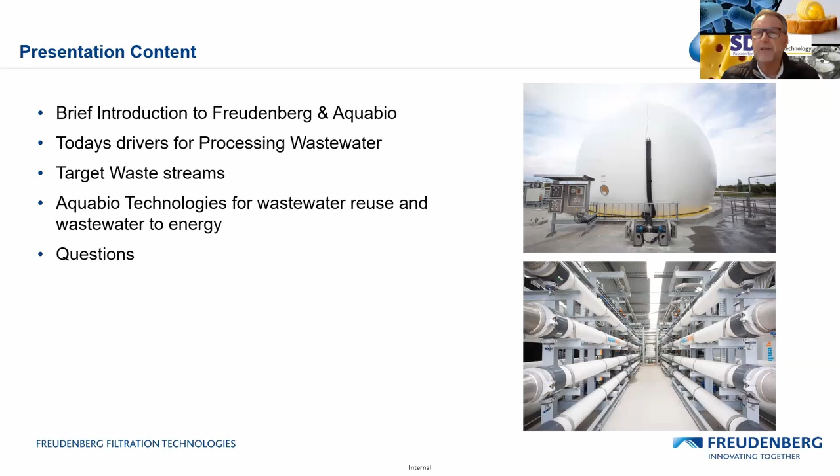I'm going to give a quick brief introduction on Freudenberg and Aquabio. We're also going to look at the global trends in processing water and water recycling and net zero. And there's both a global trend, but there's also the local challenges it gives us as well. So I'll have a quick look at that. To try and hone it in a little bit before Dave speaks about the actual technologies, I'll talk about the actual target waste streams that we'll all be used to. And then Dave will give a chat about the actual technologies itself, which you'll hopefully find quite interesting. And then I think we've allowed some 5 or 10 minutes at the end for any specific questions that we can help with.

So just quickly, Freudenberg. So myself and Dave work for Aquabio. We were acquired by Freudenberg nearly 10 years ago now, actually. Freudenberg are a large family-owned German technology development and operational business. And you'll see with some of the numbers there, there's like a 10 billion turnover, pounds sterling per annum, employing over 50,000 people globally. But when they acquired us, the real interest that they give us as the mothership, in theory, is the ability to feed down information on research and development. So it allows us to continue to develop our products that we actually bring to market.

And because Aquabio are what we call an EPC contractor, we take on full responsibility on customer sites from initial conception right through to the actual building and commissioning. There's a lot of process guarantees required. There's a lot of bank bonds put in place until the technology is up and running. So having a large company behind us gives us the ability to be able to do that.

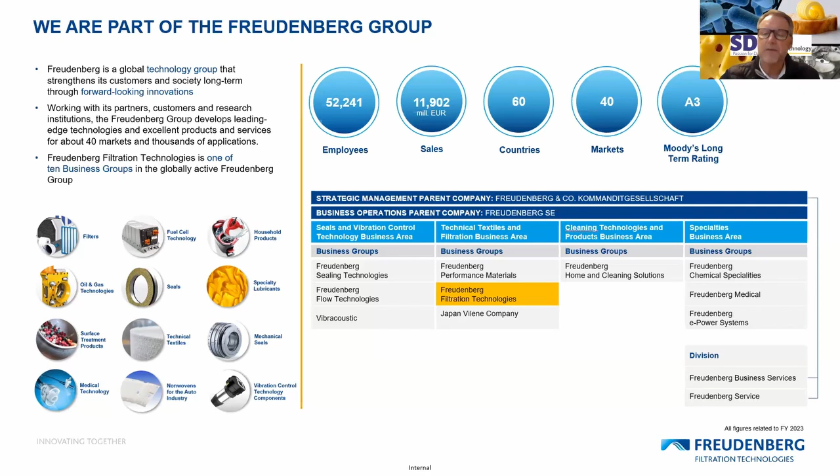As Aquabio, with three pillars, it's all really about saving energy, especially in today's world with the cost of energy, and a lot of the technologies that were developed are very much what we call low energy. So really looking at the cost of actually running them from an OPEX point of view. It's all about recovering resources, and water being one of the biggest resources to mankind, really. That's where our real focus has been for the last 25 years, focusing on recycling water. And to keep every business going, it's all about reducing costs. So a lot of the technologies we've topped and tailed and cleared over the last 20 years. And it's all about providing something that's robust, but at the same time is competitive in the marketplace.

To keep things simple, we really operate two types of technologies. You've got aerobic membrane bioreactors, and Dave will talk more about this, but it tends to look at the CIP and the high volume but low loading or low contamination waste streams. And then you've got the anaerobic technology, which is an anaerobic membrane bioreactor, which basically looks at extracting organics from high load COD waste streams, where you can extract and actually convert the material into biogas, which converts into biomethane, which in theory is a renewable energy. And in both those applications, we can then add on the next step, which takes us into water reuse.

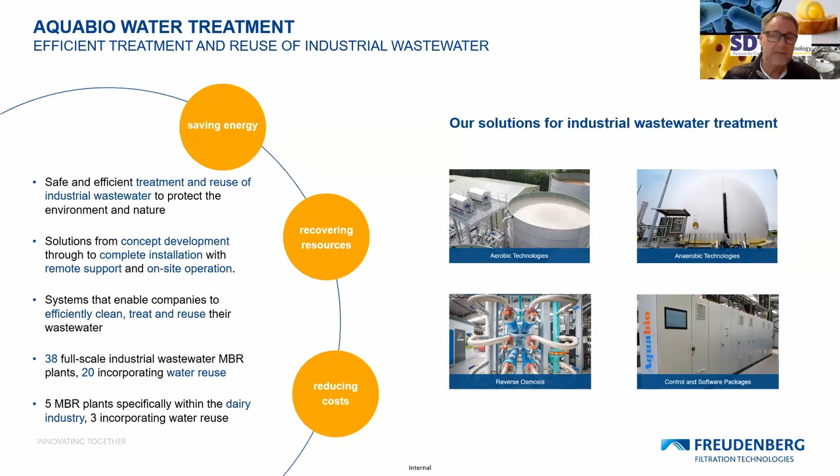It could get quite complex, a lot of this technology. So our real USP is actually the ability to control it all by our own in-house control and software packages, which is linked in with SCADAs. These type of plants, we've got 38 of the full-scale plants across the UK, and 5 of these membrane bioreactors are actually in the dairy industry. So we're well used to the waste streams and the challenges and the daily flows and CIP regimes and what have you from that industry.

So just quickly looking at the drivers, what we're noticing from a global perspective, and it's been picked up by a lot of people now looking at developing technology, is that there seems to be a new generation of consumers. So people actually buying the end product are looking at how a product's actually manufactured, where it's manufactured, how much energy, what's their carbon footprint. And a lot of the work we do actually, and you probably pick up from the Scottish accent, is from the Scottish distillery market.

And they've got a challenge. So if you imagine making a pint of milk and putting it in a carton, then putting it in a warehouse, and then trying to work out who's going to buy it in 10 years' time. Well, that's actually the problem that the distillery market has got, where they're manufacturing a product now, but they're trying to work out who their market is going to be in 10 years.

And they've realized that the market in 10 years is going to be a much more savvy audience and consumer that's going to be looking at what the carbon footprint is, how much energy they're taking, how clean it is, how they deal with their waste. And I think it's important now to start looking at that; the consumers are definitely driving the market and how products are actually made and manufactured.

Cost, huge driver, always will be. I think there was mention earlier about the changes over even the past 4 or 5 years in world politics. Energy security is really important. If there's the option to take indigenous waste from any site and convert it back into energy, that has to be seen as a positive step forward. One from a corporate responsibility point of view, but also from a consumer point of view as well.

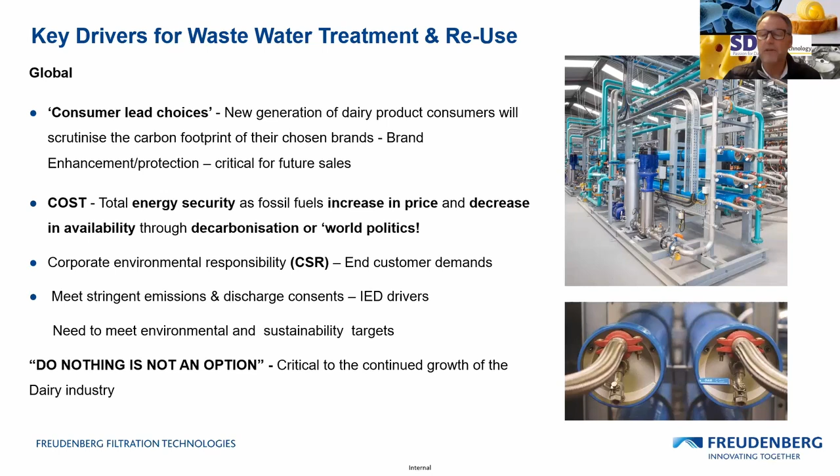So that was the global look. If you look at the day-to-day issues that we all see on customer sites, there's limitations on water demand from network and aquifers. We're seeing huge issues on the east coast of England on water scarcity, where businesses are finding it difficult to grow because they can't get access to water. So the idea of recycling water could be quite interesting.

We're seeing costs increase both for discharge consents and for water coming in. So if there's an ability to recycle water, there's a huge cost-saving benefit there. Water and the management of wastewater is an ever-increasing and valuable resource because it's a cost. If you can manage that cost better, there's a solution in there. So the solution that we've got is to manage and valorize waste and byproducts, in a lot of cases whey waste, on site to turn indigenous waste into local renewable energy or clean water.

And how do we do that? Well, we've got two types of technologies that Dave will come on and talk about. You've got an anaerobic membrane bioreactor, which is looking at liquids, and that turns waste into biogas or biomethane. And we've got an AMBR, which is an aerobic membrane bioreactor with an RO added onto it. What that's doing is taking water and cleaning it into potable water. So in theory, it can go back into product, which we're actually seeing in some sites already.

I understand there's sometimes a bit of a psychological step about using recycled water back into product, but many industries now are doing that, and they're also taking it further. They're also using it for CIP processes and general maintenance and cleaning.

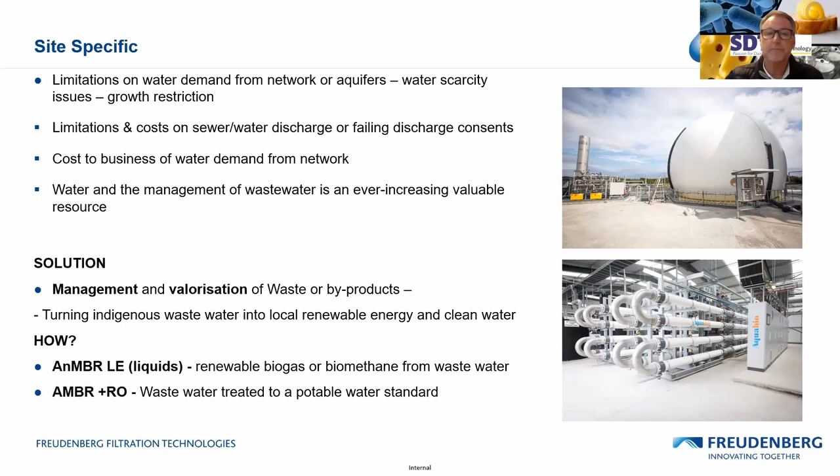Just to focus a little bit, the waste streams that we would particularly target, and I touched on this earlier, are low to medium COD, so it tends to be high volume, low strength. That's typically from CIP regimes, and that can vary depending on what regimes are put in place at each factory or processing outlet. So having a technology, and Dave will talk about this, that's flexible on how it receives material, what loads, what flows, which can fluctuate greatly, is really important.

You then go into the higher COD waste, where you've got a lot of sugars which you can convert into biogas. So that's on-site indigenous energy, and that tends to come from whey and whey permeate. And I'm sure we've all come across unused milk for whatever reason. That could be processed through this technology as well.

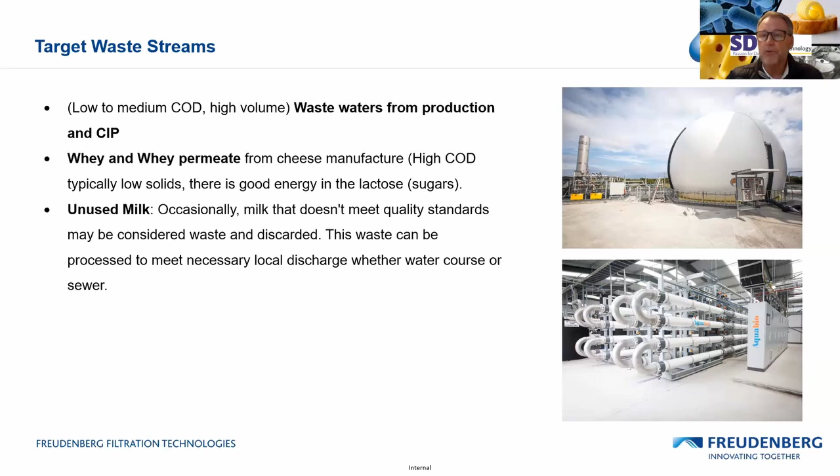So I'll pass you on now to Dave, who'll take you through a technical walkthrough of how the technology works. And again, there's time for questions at the end if there's any specific questions.

Thanks very much, Phil. Morning, everybody. Right, our AnMBR process.

We take wastewater or feedstock, and this enters into our bioreactor. This bioreactor is a tank which is kept under anaerobic conditions, which is essentially in the absence of oxygen. Usually, but not always, some of the waste stream needs to be supplemented with some nutrients. This is to aid the biological process. Some of the streams are a little bit deficient in nitrogen, not necessarily phosphorus, but certainly some of the micronutrients. So there is occasionally an addition of a nutrient solution added to the waste stream to aid that biological process.

Within the anaerobic bioreactor, as Phil's already alluded to, the organic matter is converted into biogas. So that biogas can then be utilized either to produce energy on site via boilers or steam generation, or on occasions that biogas could be refined or enriched and entered into the gas main national system and sold as an energy source to the public or other industries. Also occurring in the bioreactor, the COD is converted into a small amount of biomass.

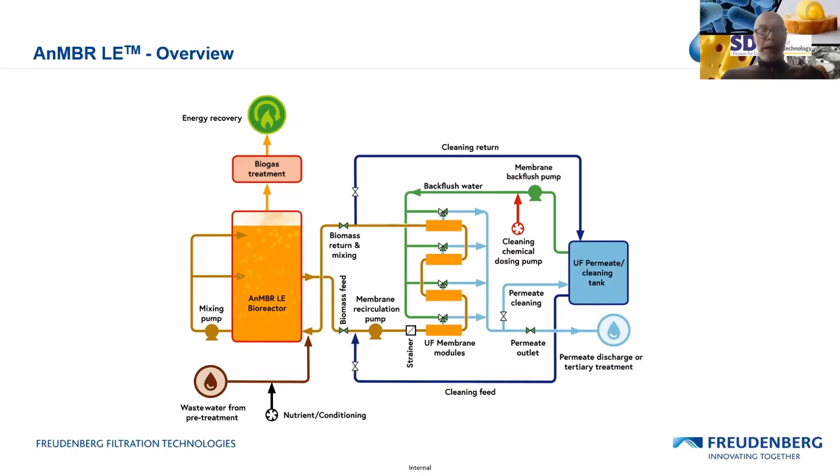So typical waste streams that are suited to the anaerobic process: you want to consider where you want to maximize the use of the biogas or produce a biogas from your waste stream, and that utilization of that energy is critical to your process, or is certainly seen as a revenue stream. You may also want to achieve higher COD removals to reduce the sewer discharge costs, and potentially produce an effluent that you could discharge to a water body if that's applicable to your particular geographic location.

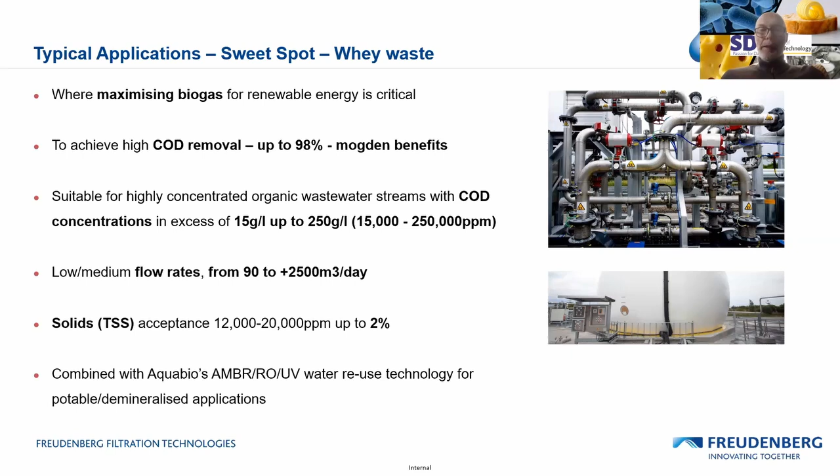Waste streams that are more, as Phil was alluding to, applicable to the anaerobic process are high strength or organic streams. So with CODs, concentrations between 15 to 250 grams or 15,000 to 250,000 ppm of COD. Low to medium flow rates. Our anaerobic process can tolerate waste streams which have suspended solids up to 20,000 ppm or 2% dry solids. And when combined with our AMBR, RO and UV, the effluent produced can then be carried on and retreated to produce a water which is deemed potable or certainly utilized for reuse.

Other benefits that we get from the AnMBR process is that because we're using a membrane system, we're reducing or eliminating the suspended carryover from the process, and that mitigates the biomass washout. We're producing a very high quality suspended solids effluent. We've got the ability now because we can decouple hydraulic and solids retention within the reactor. This allows the process to be run at relatively long sludge ages. This certainly helps with the degradation of some slowly degradable components within the effluent.

Typically, we produce high COD reduction and biogas quality and yields, which are in excess of some of the other higher rate anaerobic processes, such as UASB and EGSB. Our process is also more tolerant to suspended solids and fats, oils, and greases than a traditional granular sludge process. The low energy biomass separation system that we incorporate doesn't need flocculants or coagulants to aid that separation process. And typically the energy that we will consume during the membrane process will be between 1.5 to 2.5 kilowatt hours per meter cubed of permeate output.

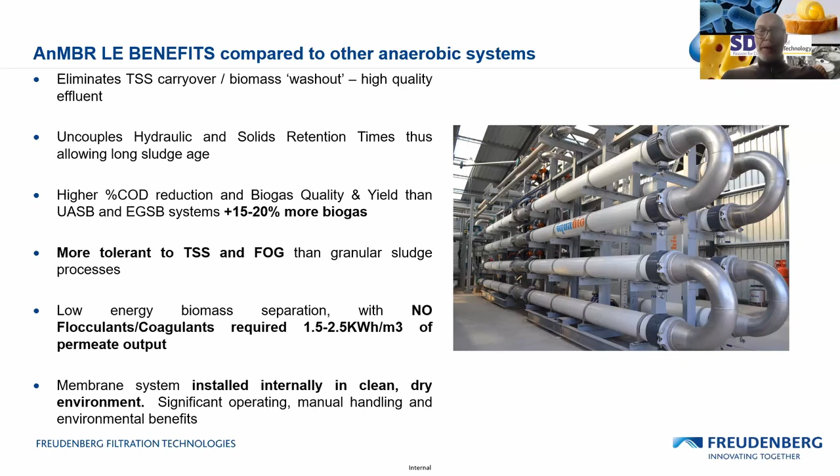As you can see from the photograph shown on the slide, our membrane systems are installed internally in a clean, dry environment. This has a significant advantage when it comes to operating, manual handling, and environmental benefits. Our other process, which is now the aerobic process or an AMBR, adopts a very similar process stream. The only real exception here is we've now got a bioreactor that's no longer anaerobic. So the biomass is utilizing atmospheric oxygen derived from the air, blown into the reactor, and we're using that oxygen to degrade the COD down into water and carbon dioxide.

Oh, sorry, Phil, if you pop back to the previous one for us.

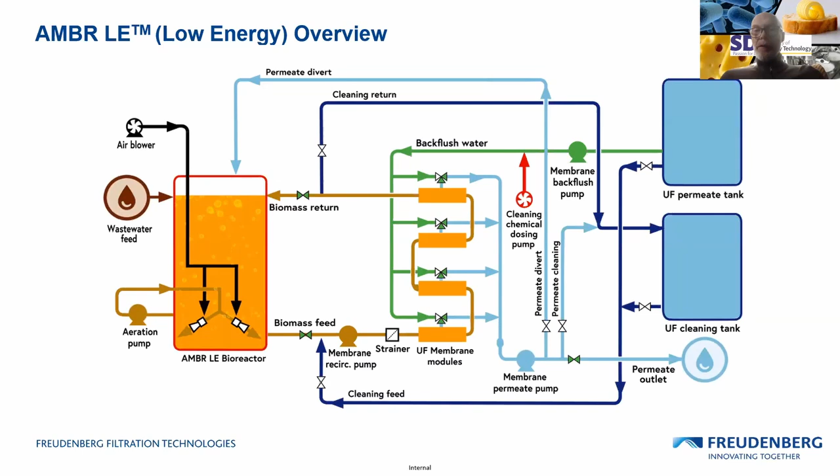Again, we're using an identical membrane system. So we're recirculating that biomass through the membranes and separating treated effluent from the biomass. The only slight difference here now is that we found that the filterability of an aerobic sludge or an aerobic biomass is slightly better than an anaerobic equivalent biomass. So the number of membranes used to produce the same amount of output is less. We utilize all the same mechanisms for backwashing and cleaning of the membranes.

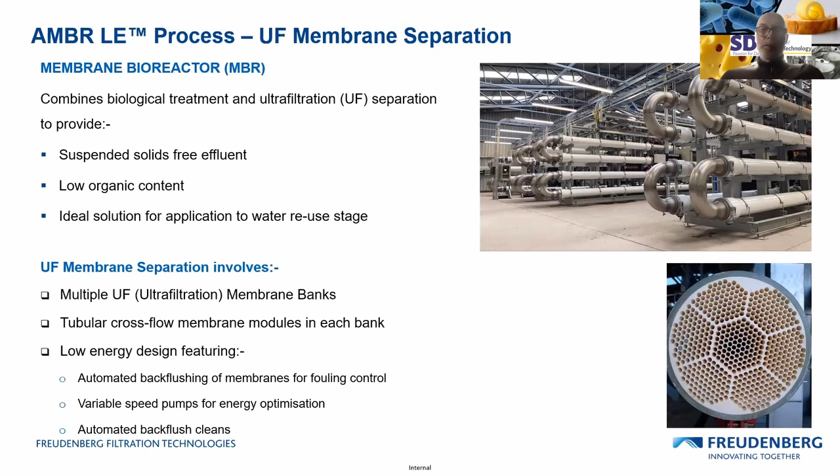Our final membrane technology that we incorporate is reverse osmosis. The previous technologies that we've just spoken about have produced a good, solids-free, low organic content effluent. We've now got to address the dissolved components that are left in the effluent that need to be removed in order to produce a water that is of a potable standard.

So sorry, Phil. Let me step back one for me, thank you.

We also produce from this process a slightly more concentrated waste stream, or what's referred to as RO reject. That could still be of sufficient quality to be discharged to sewer, or even on some occasions, when blended with other UF permeate or other final effluent, could be discharged to a final watercourse. We've now got a water that's of acceptable quality for reuse within the factory.

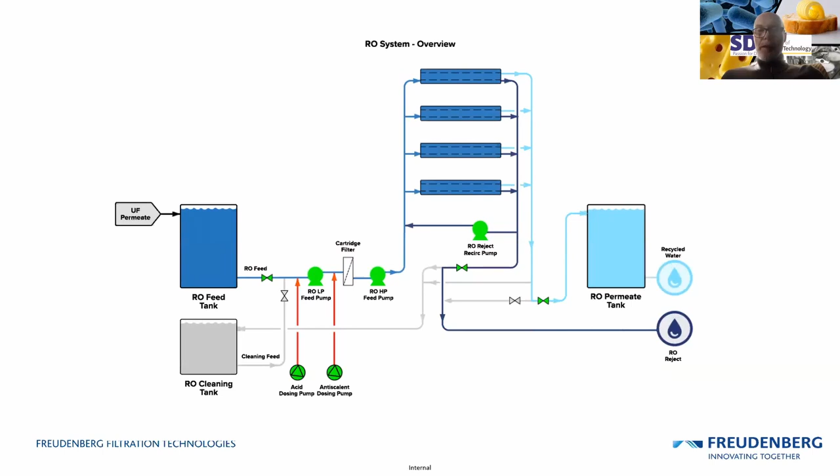Next slide, please, Phil.

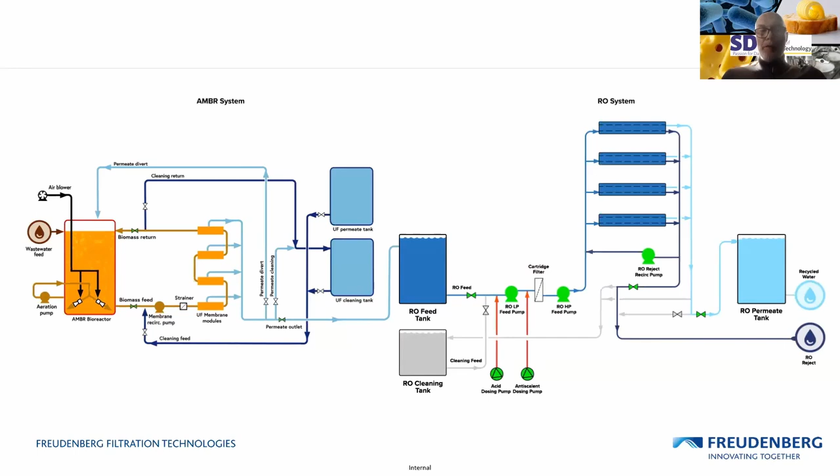As I say, the potential uses for this reuse water: it can be blended with mains water and used as a source of potable water within factory applications. This could include use for CIP. It could even be used in ingredient production. It could be used as drinking water or in canteens. And of course, it could be used for site or vehicle cleaning.

Non-contact uses could also be used for cooling towers or washdowns. We've had applications where it's been used as water for boiler feeds, and on the odd occasion, it could also be sold to other local businesses nearby for their application.

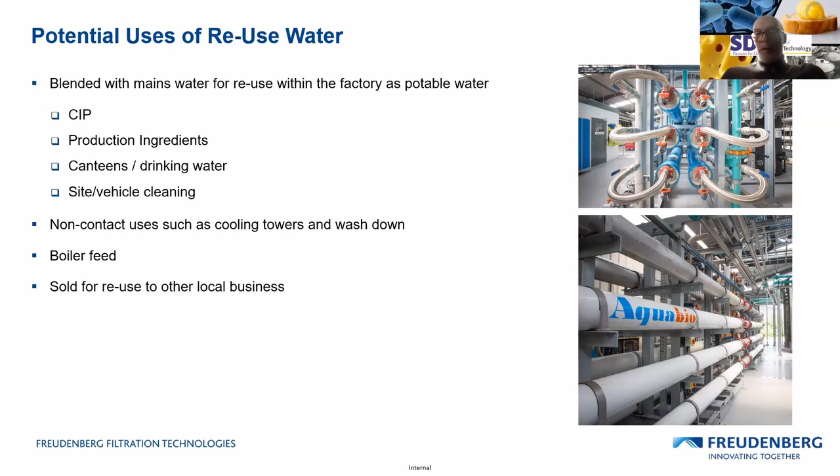Finally, I'd like to highlight some of the safeguards that our technologies provide in terms of quality. The technologies that we are providing are proven best available technologies according to the European BREF documents. These offer 3 levels of protection. Ultrafiltration membranes: we're filtering down to 0.03 of a micron. This provides a barrier to solids, parasites, and bacteria.

The RO membranes then still provide a barrier to solids and bacteria, but we're now down into protecting against viruses, organics, and the partial removal of some of the salts and ions contained within the effluent, some of them up to 99% rejection.

For all of our plants which use a recycling application, we also provide disinfection via ultraviolet light. This renders 99.99% of pathogens, bacteria, and viruses harmless, and is certified to the German DVGW standard. Finally, the water that we produce from a combination of these technologies conforms to the requirements of the private water supply regulations of all areas of the UK.